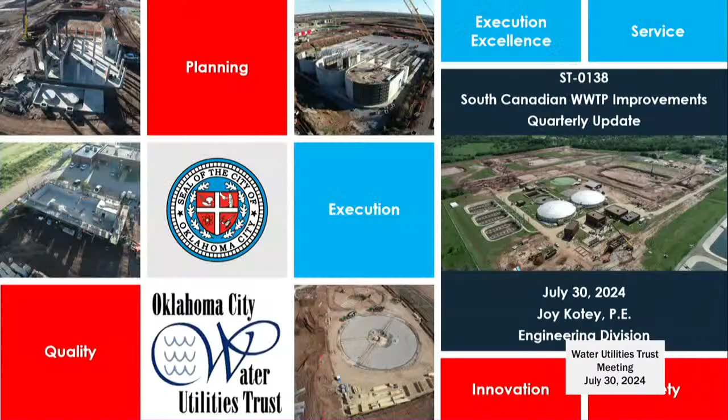Let's go back to item 8B and see the presentation on the South Canadian Wastewater Treatment Facility. So these are the quarterly updates for South Canadian and then the Atoka Pipeline, and I am very sorry for overlooking this item. Good afternoon, Mr. Chairman and trustees. My name is Joy Kotey, and I'm the Wastewater Treatment Project Manager for the Utilities Department. As Mr. Browning said, today is our quarterly update on our largest construction project on the wastewater side, the South Canadian Wastewater Treatment Plant Improvements Project.

Some of the project drivers, not shown here, but just as a quick refresher: many of the components of the plant constructed in 1986 have reached the end of their service life and are in need of replacement. We also had more stringent effluent limits for our discharge, and we wanted to enhance treatment capabilities. So with CP&Y, now doing business as STV Infrastructure, and Crossland Heavy Contractors, we started this project in August of 2022.

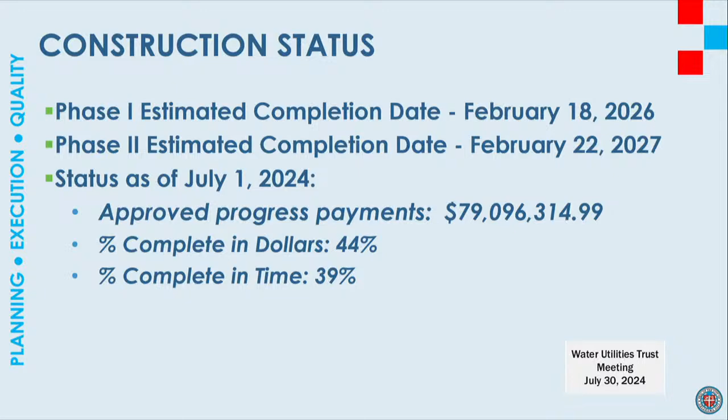We're approaching 2 years on the project. So far, we've completed about 40% of the time for this project and about 44% of the payment, just over $79 million. Our Phase 1 major milestone, substantial completion with most of our new systems in place and commissioned, will take place in February of 2026. Final completion, which includes demolition of existing structures, cleanup, and other balancing and testing, will take place in February of 2027.

In the last 90 days, we've made significant progress on the front and on the plant. We've completed the outfall and all of our effluent pipeline activities. We've completed the concrete pours for the aeration basin, which is our largest concrete structure on the project. I do have some photos to follow.

They have also wound our precast, pre-stressed concrete clarifiers and provided shotcrete, a certain type of grout mixture, on the walls on the outside. And they've formed and poured walls in the filter complex and our recycle pump station.

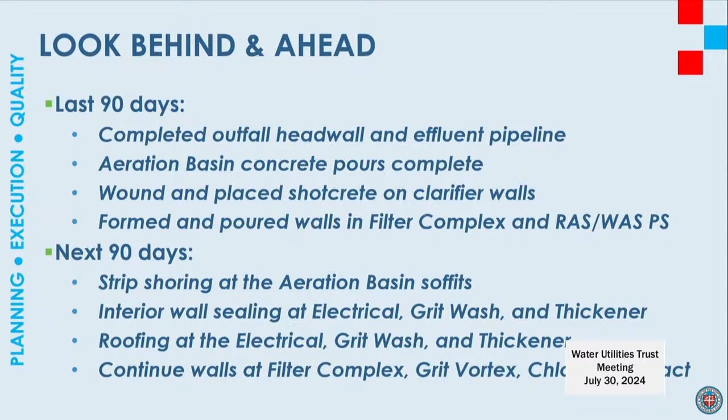Future events that we're looking forward to: they'll be stripping the shoring off the soffit at the aeration basin, working on sealing the walls in some of our electrical and grit wash buildings. We're also working on the TPO roof system for many of our buildings, primarily our electrical rooms, and then we will continue to form and place concrete on our various structures.

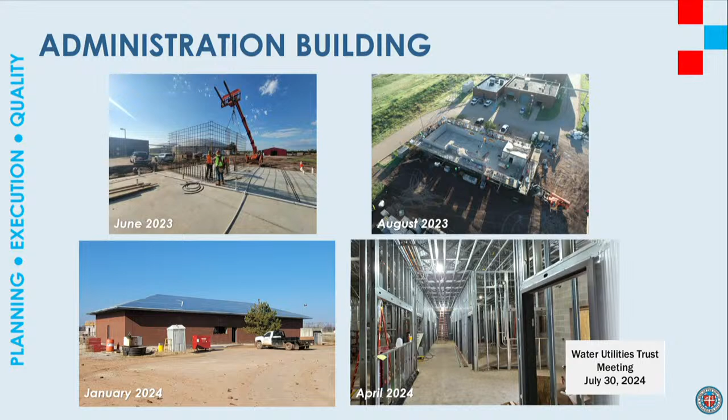So with that, I'll go ahead and show some of our photos. This is a little bit of a timeline from last June to now for our administration building. They are continuing interior work in this area as far as cable trays, conduit, other electrical, and HVAC work.

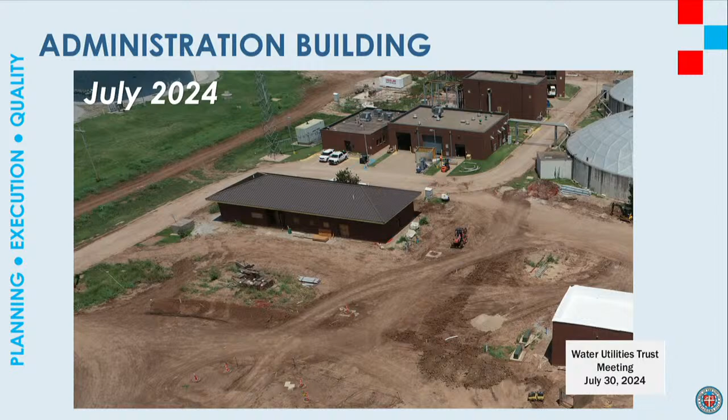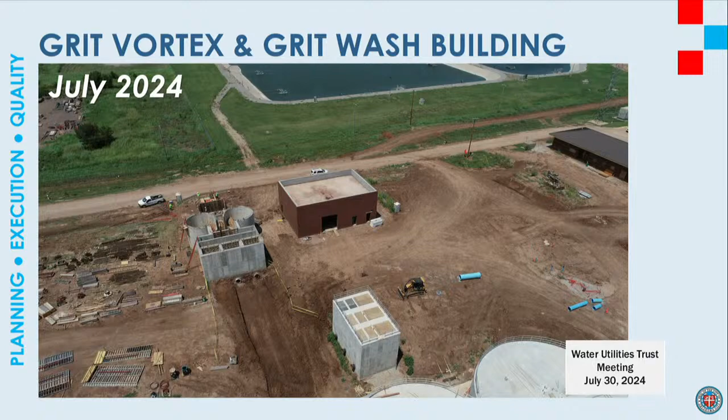We've made significant progress in our grit vortex and grit wash areas. We now have concrete formed in those areas. We have masonry on the building, and we also have the TPO roof system, the white roofing on top.

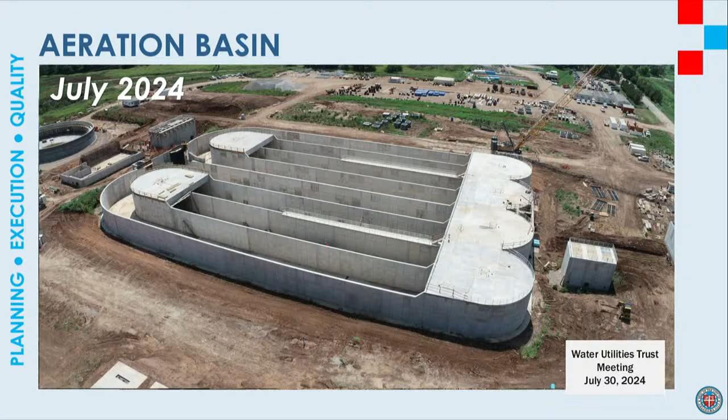For our largest structure, the aeration basin, we've made significant progress. As I said before, we've finished the concrete pours, and on the south side, which is to my left, you'll be able to see some of the forms and shoring that still need to be removed. The picture doesn't quite do it justice. It is a massive structure.

We've also made great progress on our clarifiers. We actually completed all of our foundation work and underslab, and we now have 2 concrete tanks sitting there. We are currently getting our mechanisms and other items inside the clarifier coated at this time.

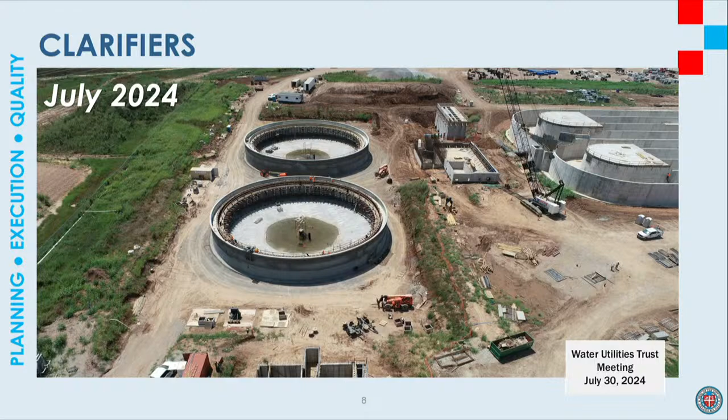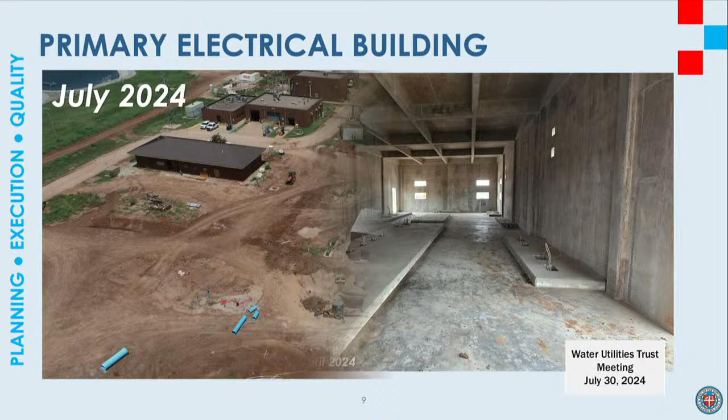As for our primary electrical building, we've completed the outer masonry and the generator pads outside the building, and they have also installed the TPO roof system, which is white.

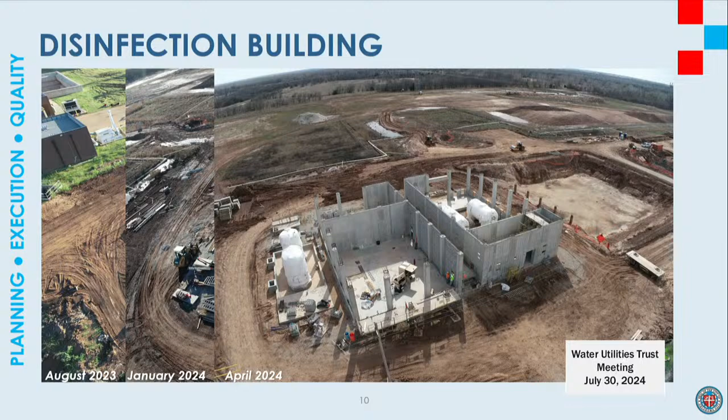As for our disinfection building, our sodium hypochlorite generation system, and our brine storage area, we now have our masonry courses, some of our roofing, and to my left, you'll also be able to see our new chlorine contact area for disinfection purposes.

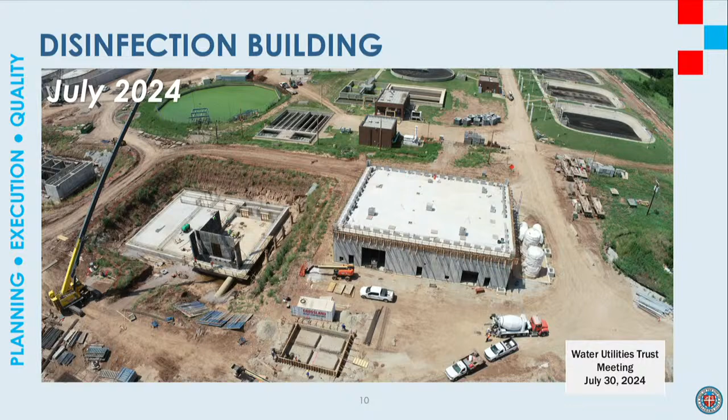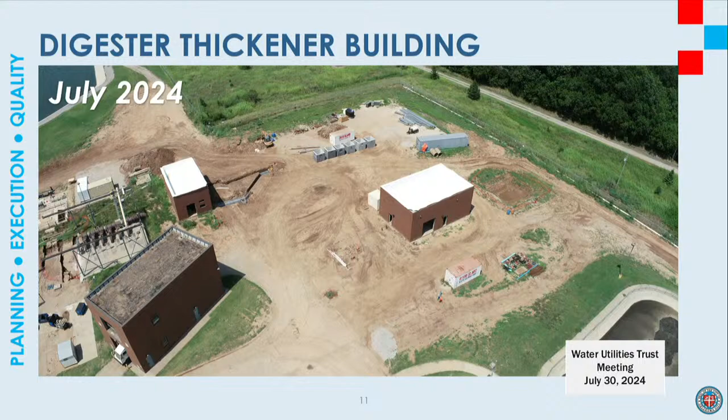And last but not least, on the solid side, we have slight progress on our digester thickener building by adding our roof system. And to my left, you can see the smaller building, which is our influent electrical building, which also has a new roofing system on it.

With that said, that's all I have for our quarterly update. We've made some great progress. We anticipate being complete with most of our concrete activities by the end of the year, so most of our work will be turned inside for interior electrical and HVAC work. We are also working with the contractor to develop our startup plans because things always tend to go wrong in startup, so we want to be as prepared as possible.

That's it for my presentation. I'd be happy to take any questions you have.

Completion date is? February 2027. Okay. Thank you. Thank you, Joy. Very good. Thank you. Andrew?

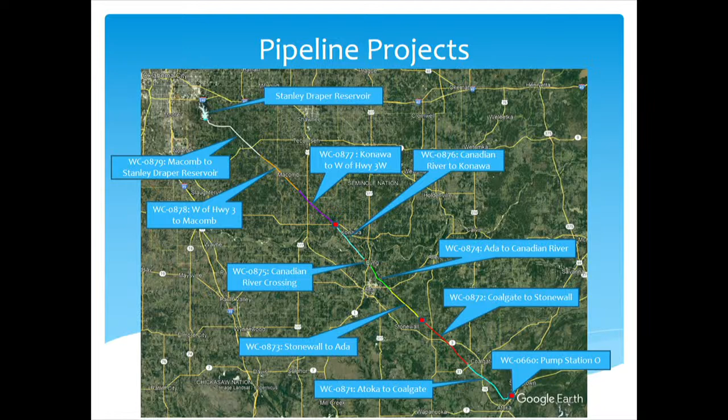We'll go through some of the quarterly updates for the construction progress of the Atoka pipeline. This is an extensive project going from Atoka Lake at the south end up to Stanley Draper Reservoir, with 9 different project segments and 3 pump stations being built along the way. It's a total length of 98.6 miles. Under construction right now we have 43 miles. Last meeting you approved the advertisement for another section that's just under 11 miles, and also the Pump Station O project down at the south end of the lake.

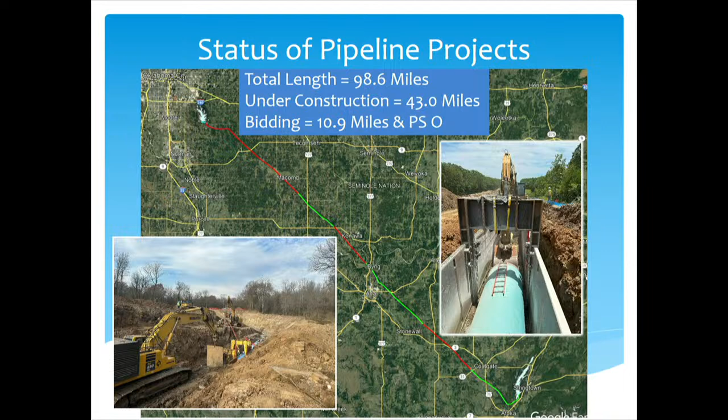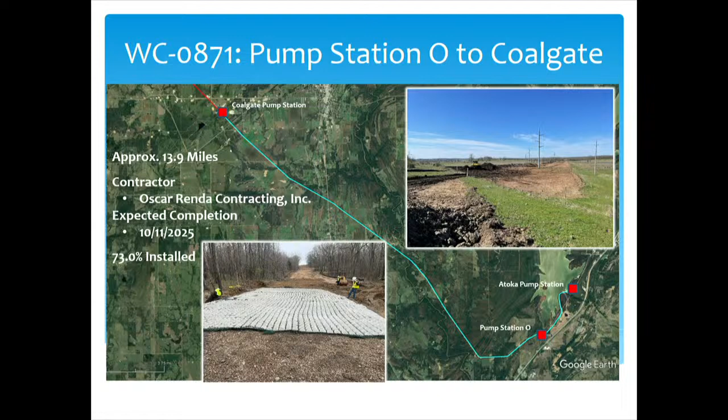Section 871 goes from what will be the new Pump Station O up to the Coalgate Station. It's just under 14 miles. Oscar Renda is our contractor. It'll be finished October of next year. We've got about 73% of the pipe installed in the ground right now. You can see some of the work to reestablish the easement, as well as putting down flex mat material for erosion protection at the creek crossings.

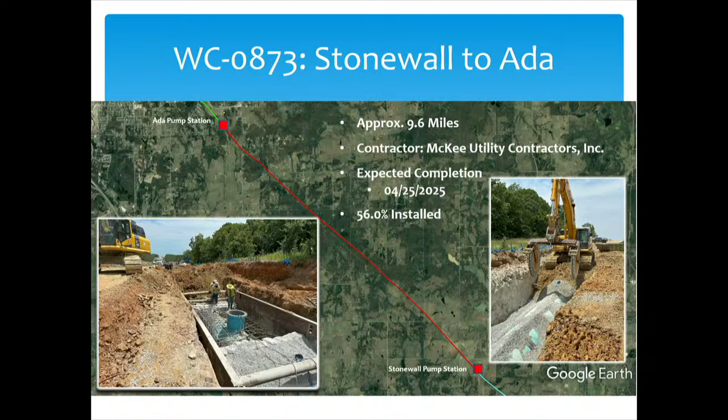873 is our next section. It goes from Stonewall up to the Ada pump station, a little over 9 miles. McKee Utilities is the contractor. They'll be finished up next year in April. We've got about 56% of the pipe installed right now. Progress is moving along really well along this section.

874 goes from the Ada pump station up to the Canadian River. It's an 8-mile section, and McKee was doing this section as well. Progress with the pipeline installation is complete, all the pipe is in the ground. Right now we're just working on the air release valves and the corrosion protection system being installed on the steel pipe to keep it from corroding. Site restoration and testing is all that we have left. We should be getting done with that project in the next couple months.

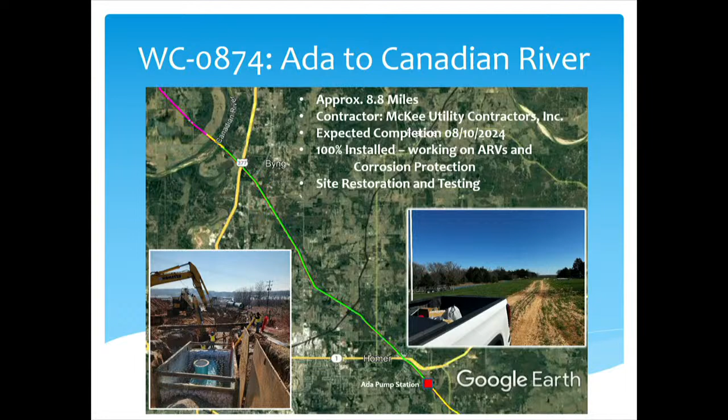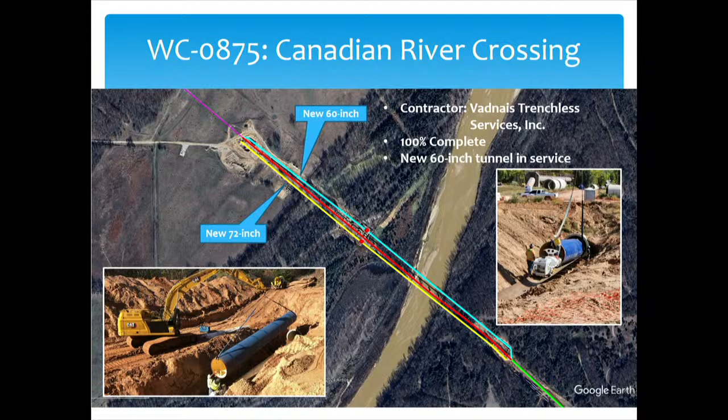The biggest item we have is the 875 Canadian River crossing, which from our last update is complete. We have it installed - the new 60-inch tunnel that was put in with the 72, so there's 2 tunnels underneath the river. We got the tie-in completed on the 60-inch, so we are no longer using the old aerial crossing that went over the river. That was a good accomplishment that we were finally able to get done. So that's good news.

877 is the next section. It goes from Konawa Pump Station up just past Highway 3, a little over 10 miles. Again, McKee Utilities is working on this section. It'll be getting done around this time next year. We just started doing the pipe installation - we've got a lot of pipe on site, ready to go in the ground. They've been working on the tunneling that goes underneath Highway 177. You can see in the bottom left picture they've been using this rock trenching excavator to dig all the rock along the alignment in that section. We've got that pretty much all completed, so we're ready to start installing pipe nice and efficiently. We should be able to make great progress as we move through this section.

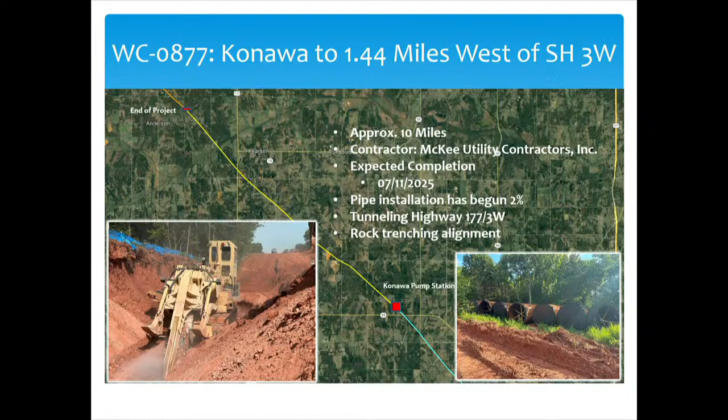Like I said at the beginning, last meeting you approved the advertisements for 876, which is the Canadian River up to the Konawa Pump Station - they're in the middle of the alignment - as well as the Pump Station O down by Lake Atoka. The Pump Station O has a tank, pump station, surge control facilities, and tie-ins to the 60-inch as well as the McGee Creek pipeline, which you can see in that image. After that, we'll be advertising another section later this year, probably the 872 section, as well as another pump station at the Stonewall Pump Station, which will be the next one to go up.

Do you have any questions about the updates?

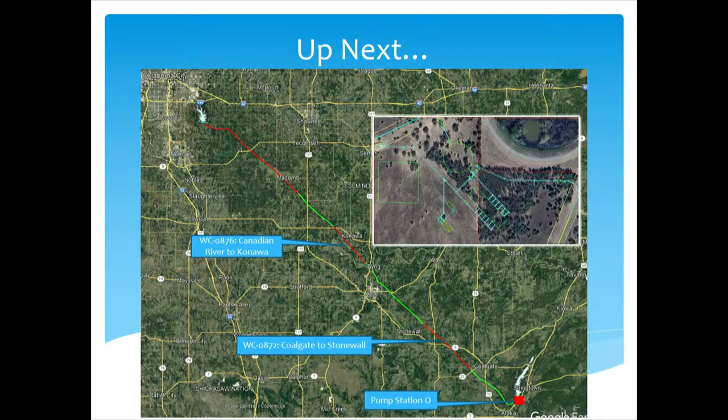We got a lot of work going on, yeah. Yes, we're happy it's - had a few leaks in it that we were dealing with, so it's substantial. It's a good thing to have that offline. Yeah, we're good to go there now, so thank you Andrew, great job. Thank you.